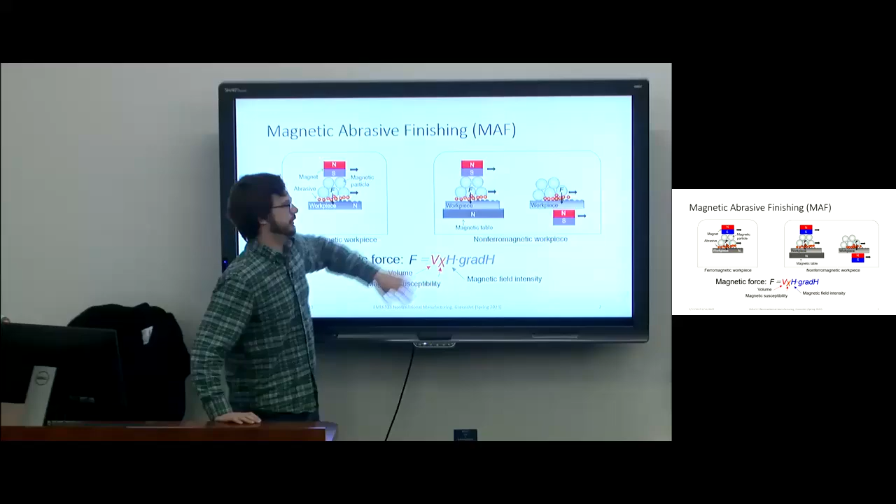So let's talk about what MAF is first. Magnetic abrasive finishing uses magnetic particles mixed with an abrasive to grind away and abrade and finish a workpiece. There are 2 sort of setups you can use for it, demonstrated here on the left and right. On the left, we have the case for when your workpiece is ferromagnetic, and on the right, the case when your workpiece is not ferromagnetic. So your workpiece does not have to be ferromagnetic for this process to work.

So here we have a magnet with the north and south pole. Your workpiece here, which is ferromagnetic, serving in this case as a north pole. So your field lines are going to be connecting from your workpiece to your magnet, and then you have some larger magnetic particles mixed with a finer abrasive.

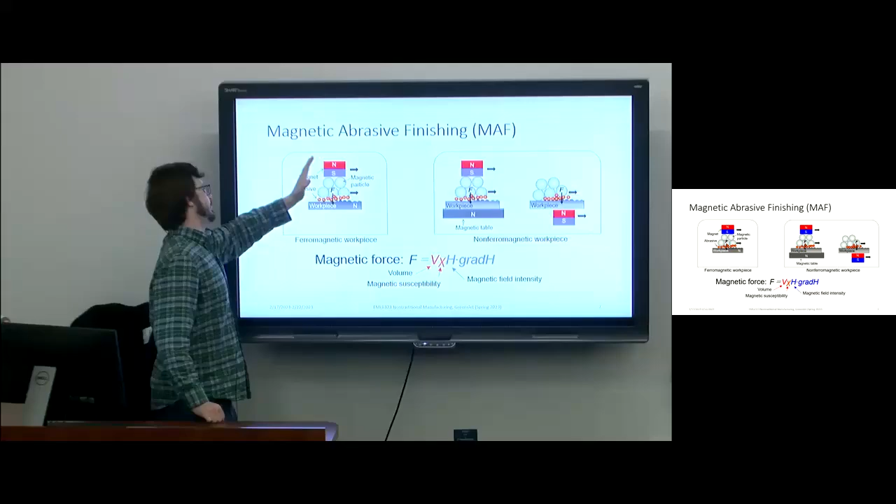What's going to happen is those magnetic particles are going to want to align with the magnetic field between your magnet and your workpiece, so they're going to form like a brush almost. Your abrasive is going to be pushed by that brush along your surface. As you move your magnet from side to side, your magnetic particles are going to follow that along with the magnetic field, and they're going to push into and slide along the workpiece, your abrasives. So that's going to grind away and gradually remove these burrs.

So you can see here, this is your unfinished part, and this is the part where it's already passed through and you've already gotten a smoother surface. So that's the case for a ferromagnetic workpiece.

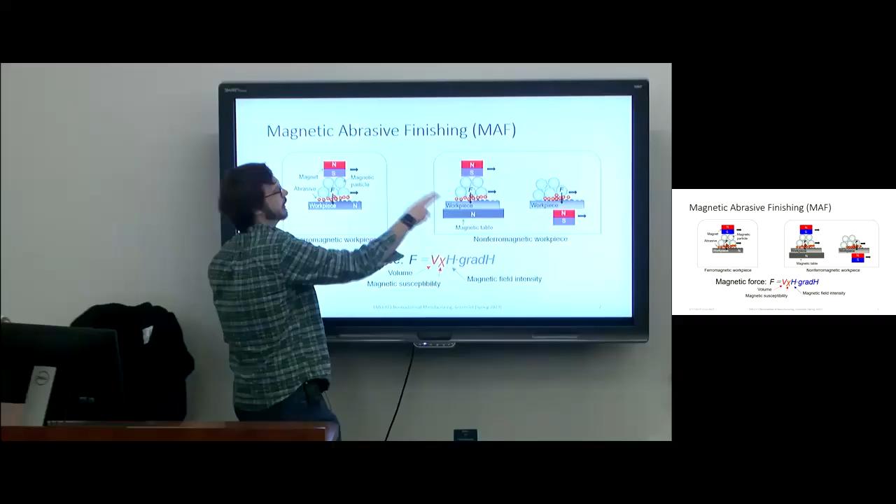Now what happens if your workpiece is not ferromagnetic? You can use one of these two setups. On the left, you can simply rest your workpiece on a magnetic table, in which case it behaves the same as the previous case, because if you treat your workpiece and magnetic table as one piece, your field lines are going to connect and permeate through your workpiece and through the table. Then it's the same process: your particles align with the field lines, and it's going to brush and move the abrasives along your workpiece and polish your surface.

Another thing you could do is simply use a single magnet like this, and then your magnetic particles are still going to be attracted to your magnet. Your field just won't be as strong. So you don't necessarily have to have a ferromagnetic table, but this will weaken your magnetic flux a little bit.

Another important point is that we're talking about magnetic particles and abrasive separately, but you can use a ferromagnetic abrasive. If an iron particle is strong enough, depending on what your workpiece is and how hard it is, you can make your brush be the abrasive itself, and you can manipulate your magnetic abrasives using your magnets. So it doesn't have to be two separate mixtures—it can be just one simple ferromagnetic abrasive that you move along.

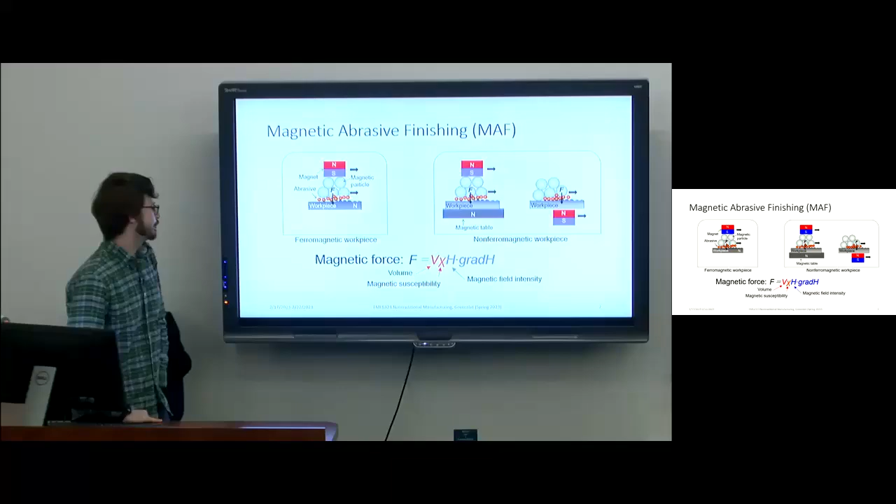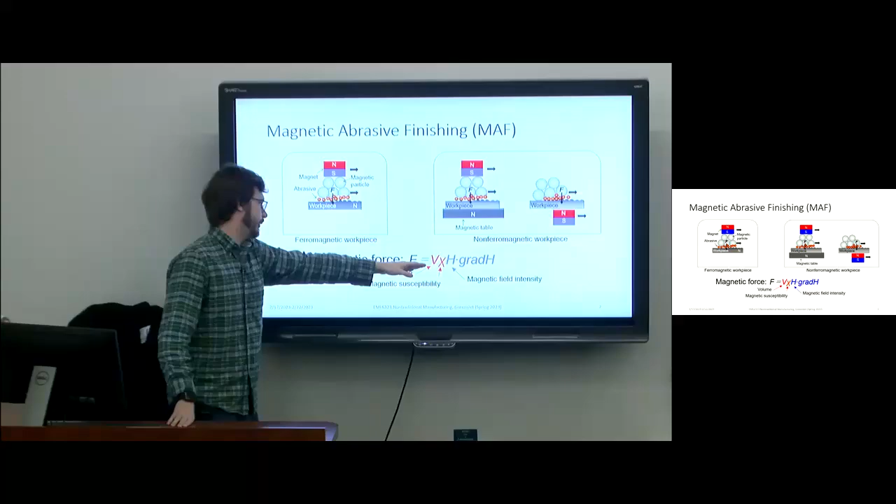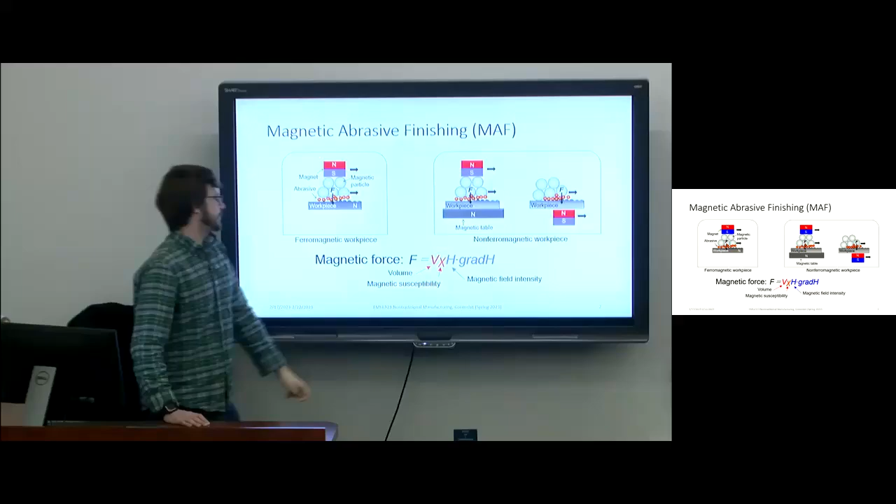We don't talk about a lot of math in this course, but just conceptually, the key parameter for MAF is your magnetic force. The force exerted on your magnetic particles is illustrated by this equation: force equals volume, which is the volume of your magnetic particles—this entire mass—multiplied by the magnetic susceptibility of those particles, a material property. H represents your magnetic field intensity, measured in Tesla, hopefully you recall that from introductory physics.

So H is a property of the strength of your magnetic field and how strong your magnets are, and you also multiply that by the gradient of H. The gradient—hopefully you guys are graduate level engineers at this point—is a spatial derivative. It is a vector quantity, which makes sense given that this is a vector and force is also a vector. So you take the gradient of your magnetic field intensity, the rate of change through space, and that will influence your magnetic force.

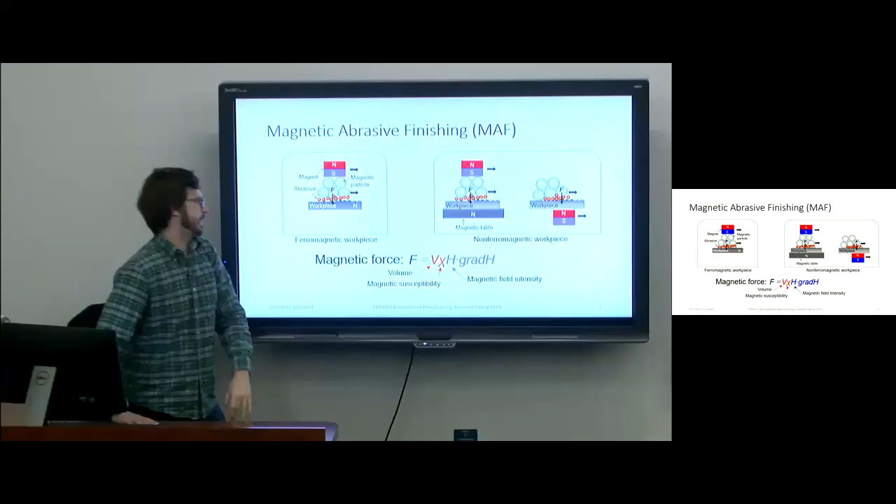Okay, so now that I've given you a brief overview of the process, let me illustrate this in a more fun way with cartoons.

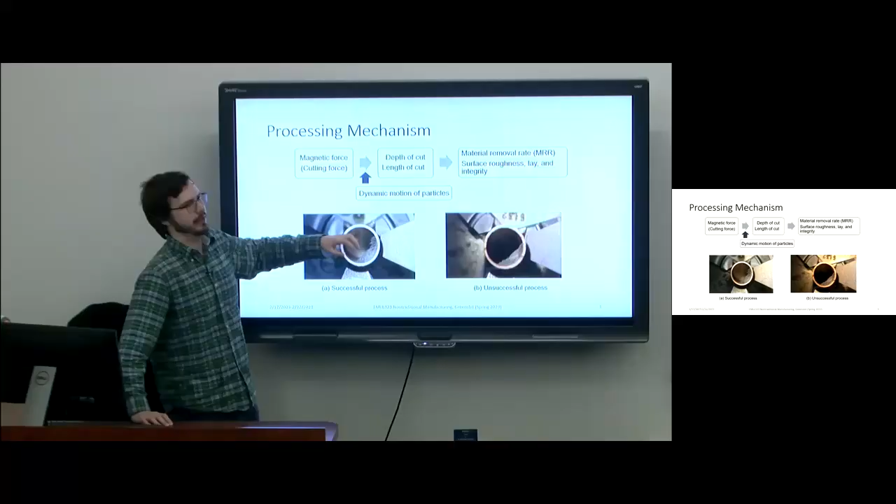So now I'm going to show you two different videos of MAF processes, one successful, one unsuccessful. First, we start with the successful process. Here we have two permanent magnets, on the bottom and on the right side of your cylindrical workpiece. Now what's going to happen is, in this process, we're going to rotate our workpiece. It's in a chuck on a lathe right now.

We want our ferromagnetic particles and our abrasive—we have a mixture of solid particles here, iron particles mixed with an abrasive—to be pushed up against this curved surface of our workpiece. Our magnetic field lines should follow as such. So we're going to rotate our workpiece, and we want these particles to stay in place while our workpiece rubs against those particles, smoothing out the surface.

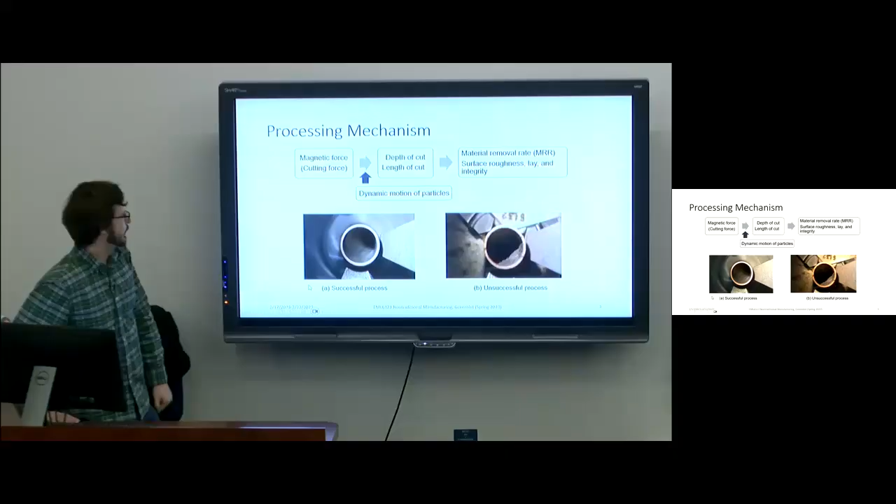And because I said it's going to be successful, that's exactly what's going to happen. It gets up to speed, and you'll notice that your particles are staying in the same region—they're not jumping around and flying around inside of that tube while it's rotating. That's generally successful. You'll have a couple maybe that scatter out, but for the most part, they're staying in contact with the workpiece. So that's what the process should look like.

All right, now I'll show you a case of an unsuccessful polish. It started off sort of stationary, but as it really gets up to speed, you'll see your abrasives going all over the place, everywhere. So you're not really getting that relative motion between your particles and your workpiece surface—you're not really getting any machining work done.

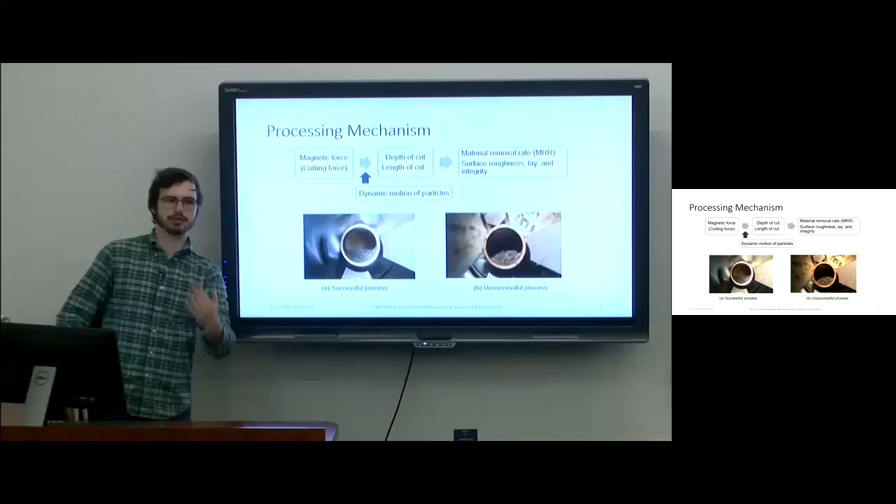Now let's talk about why this is the case. The main reason why one process was successful and the other wasn't was a matter of the strength of your magnetic force. There are two primary forces at play: you have your magnetic force, which is sort of a normal force being pulled into your workpiece, and you have your normal force that should be equal and opposite to that force. And then you have friction—as your workpiece is moving around, there's going to be a frictional force between your abrasives, your ferromagnetic particles, and the workpiece surface.

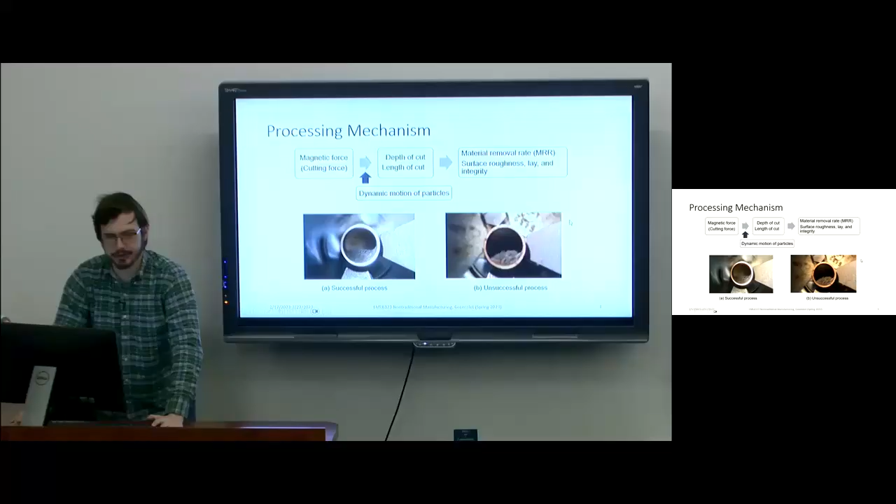If your magnetic force isn't strong enough to withstand that friction, your particles are going to go flying off. Whereas if your magnetic force is strong enough, that friction force is going to keep it in place. So it's a matter of how strong your magnetic field is to keep them in place versus the friction of the workpiece motion. That's something to keep in mind when you're designing this process—you have to make sure that your particles stay in place.

Okay, there should be a picture here. There we go. All right, let's talk a little bit about some of the advantages and the outcomes you can get with MAF.

The first advantage is what I demonstrated with the Tom and Jerry video: you have an unimpeded flow of magnetic flux through your workpiece, assuming it's not ferromagnetic. If your workpiece is ferromagnetic, the magnetic field lines will go into your workpiece and follow along its length. If it's not ferromagnetic, the flux should just pass straight through it, unaffected by your workpiece. This allows you to keep your tooling external to the workpiece and still reach internal features more easily.

Another advantage is that your magnetic abrasives are flexible chains that can conform to your workpiece surface. You have a mixture of powder that can conform easily to your workpiece surfaces, so you can finish complex internal geometries. Together, these allow you to finish and reach areas that are hard to reach with conventional tools.

Some potential outcomes you can achieve with this process: if you do a good enough job on the MAF, you can create hydrophilic and hydrophobic surfaces if you get a fine enough finish. That's an interesting property. They're not as strong in hydrophobicity or hydrophilicity relative to processes like laser machining, but you can get a hydrophilic and hydrophobic response using an MAF process. That shows you how good a surface you can get.

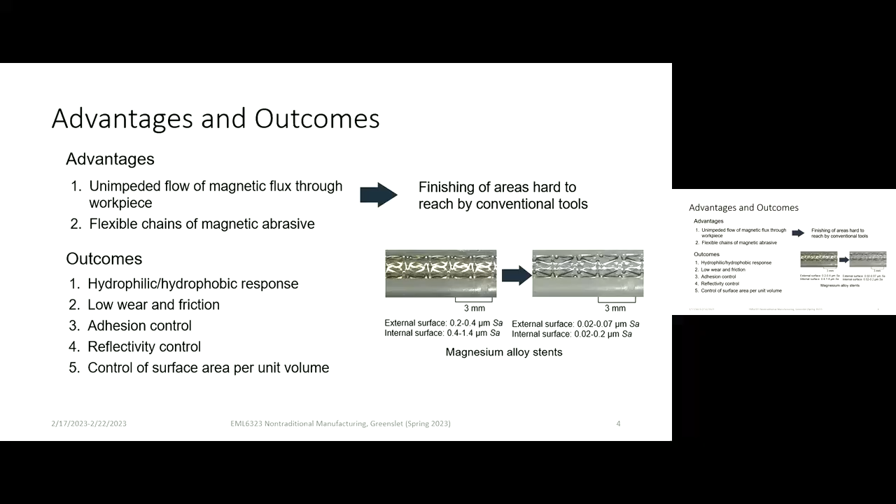We have some Sa values to quantitatively show the impact MAF has had on the surface. On the external surface of the stent, the original surface roughness was 0.2 to 0.4 microns, or 200 to 400 nanometers, and they were able to polish it down to about 10% of what it was before—so from 200 down to about 20 to 70 nanometers. On the internal surface, we also got a very good finish: it started at 0.4 to 1.4 microns, and now it's 0.02 to 0.2 microns. So it's very effective for this magnesium alloy stent.

Okay, now we're going to talk a little bit about magnetic tools. I think for today's lecture, I'm only really going to have time to focus on this first one. So we have three classes of these magnetic tools.

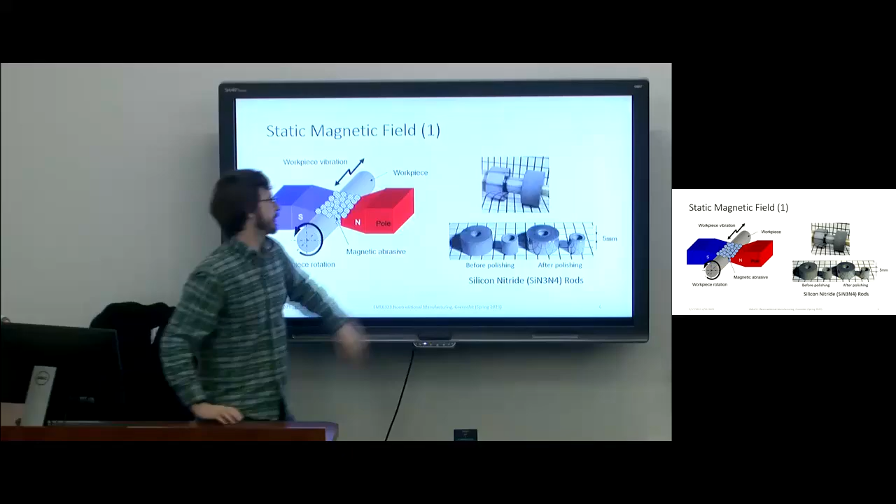In this case, these were silicon nitride rods, so this is a case of a non-ferromagnetic workpiece.

Okay, I should have pulled this up before class, forgot to. All right, so here's another example of an application using this same setup. I don't want to use edge.

All right, so this is a research paper. I highly encourage you guys to read this at home. It's only a 4-page article, so you can read this one really quickly.

What do you mean access to? I'm on UF Wi-Fi. Ugh. Can I at least look at the pictures? Oh, there we go. Okay, perfect.

Should I go through the abstract real quick? Sure, we'll start off. All right, so this article is basically describing an application using MAF to finish drill bits. These drill bits are made of high-speed steel, which is a very hard tool steel, so they're very difficult to polish. And if you're familiar with the geometry, you have that sort of helical cut in your part. So they're very hard, a relatively complex geometry that isn't the easiest to finish, smooth out, and deburr.

So this process uses magneto-abrasive machining, which is just another form of MAF, to accomplish this. Let's see if I can get that picture here. Here we go. So here we have a magnetic abrasive powder. You can't see the magnets in this picture, but they're being held basically in place through this magnetic field. And then we're moving this drill in and out of your abrasive and finishing that part.

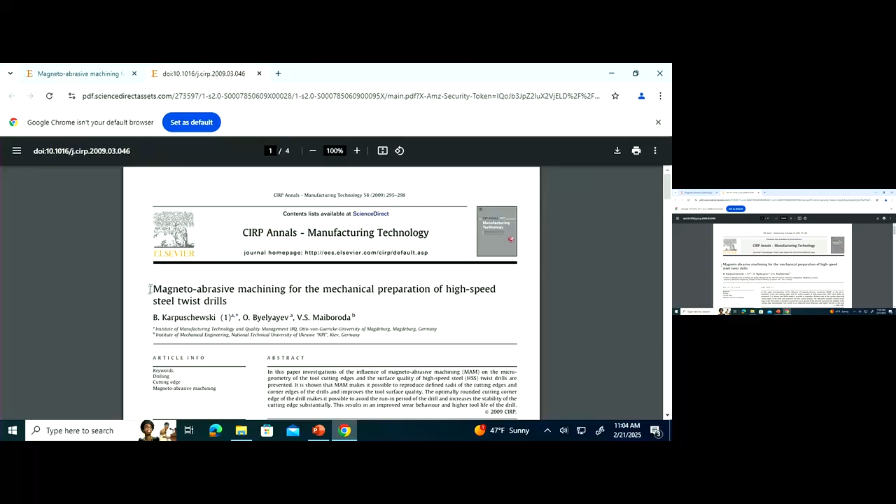I'll pause here for a second just for people watching on video who may want to grab the title and the author real quick. All right, so that's just another example of an application using MAF. Let's talk about another way you can do MAF.

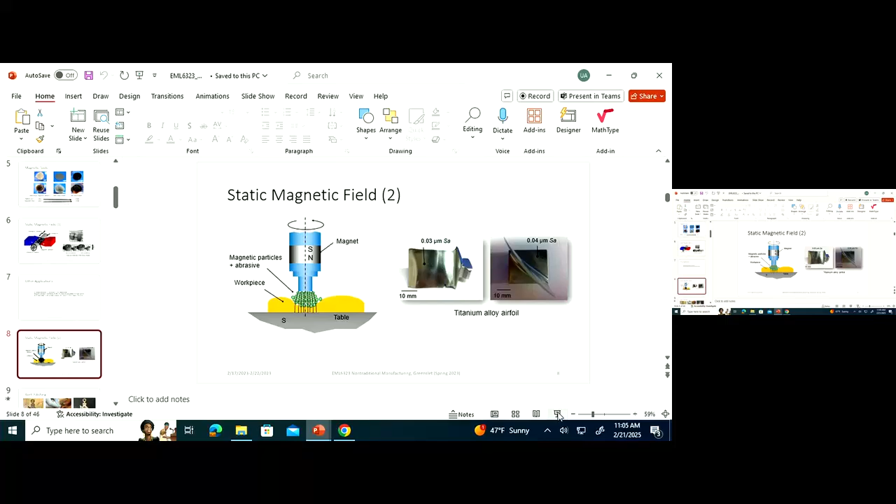So this is again using a static magnetic field, but this time we're going to rotate our magnets for this new setup. Over here we have just our table, which is ferromagnetic, and then we have a non-ferromagnetic workpiece with a rather funky geometry. We have a tool post with a magnet embedded in it, and magnetic field lines demonstrated with these dashed lines, with a mixture of magnetic and abrasive particles.

So what's going to happen is your magnetic particles are going to align with your field lines and form these long chains like a brush, a long strand of magnetic particles. Your abrasive will be resting on the bottom of the surface. Then you rotate your magnet, and those chains on your magnet rotate with it, brushing your workpiece and moving that abrasive to finish and grind it away.

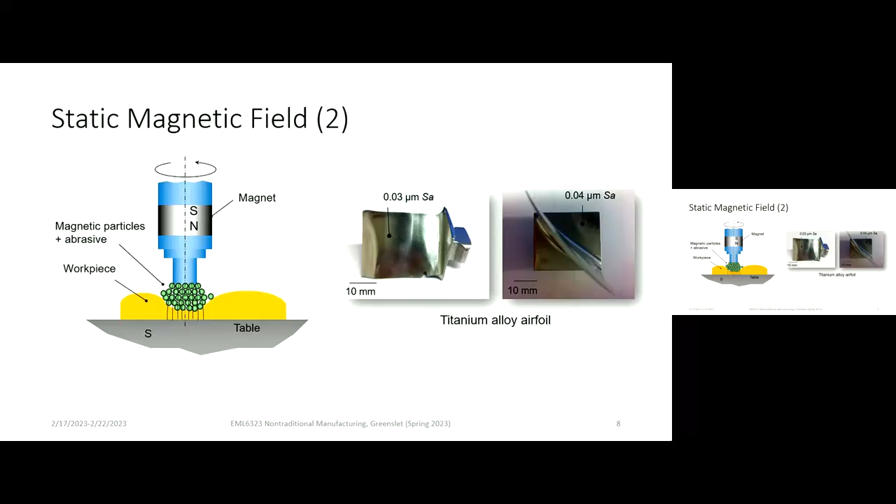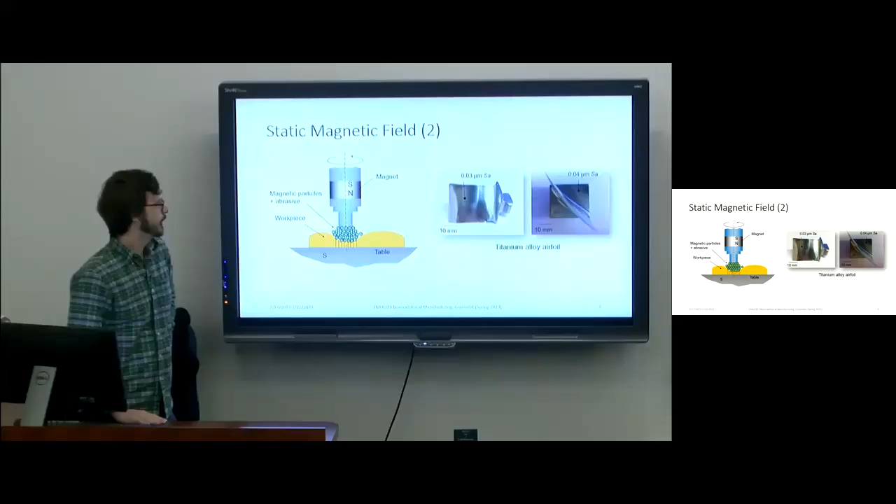Here's an application using this technique: a titanium alloy airfoil. Once again, you have a rather complex curved surface being finished using MAF. Also, titanium is a fairly hard material.

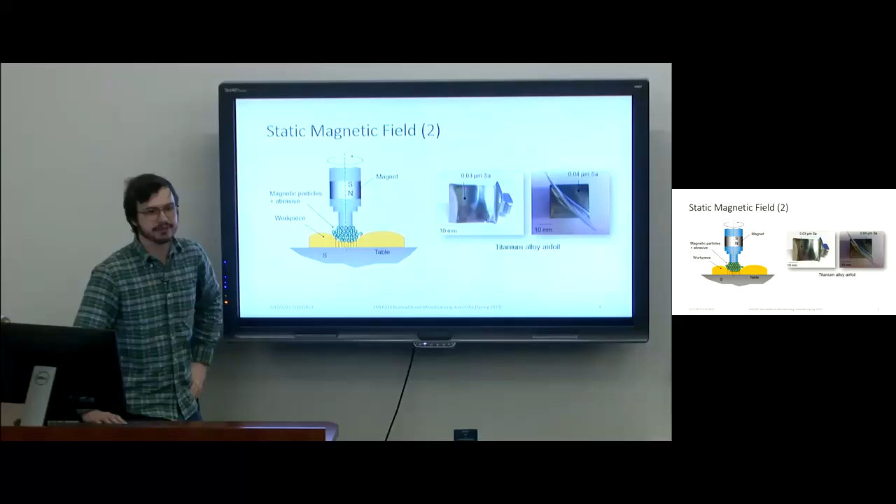Another issue you often worry about with machining titanium is the heat transfer properties. It's not a very thermally conductive material, so you get concentrated spots of heat. I'm not saying this process generates no heat, because there is friction, but I don't think it's an excessive amount, so you're still able to machine titanium with this process.

All right, here we have an example of a bent polishing.

Do we have any members here of Pi Tau Sigma in the lecture? No? It's an engineering honor society, specifically mechanical engineering I think. No Pi Tau Sigma members? Tau Beta Pi, anyone? I'm the only Tau Beta Pi guy in here?

Okay, so if you want to ask me what a bent is, it's basically this guy here, a little emblem that looks like a giant necklace. This is just their crest. So you have a picture of what the bent looked like before - you can see it's rather dull and grayed out, a very rough surface.

There's two traditional ways to polish it by hand, as you can see here - with just a cloth and an abrasive, hand polishing and grinding it away. That would typically be very tedious, obviously. But you can also use MAF instead to polish this guy.

So here we have a picture of the setup, I'll play the video in a second. This is, again, using that same setup I described on the previous slide - a rotating magnet. The gray parts you can see there, that's your magnetic brush essentially - those are your magnetic particles. And that white liquid you're seeing is your abrasive fluid. So we're basically brushing with this magnetic brush, with that rotating magnet, and abrading away and smoothing out that surface.

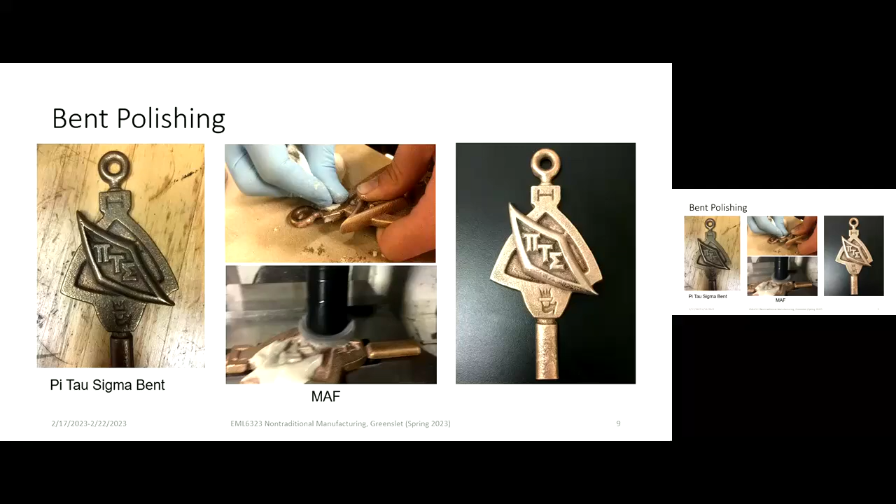And again, this is a rather intricate geometry - you have dents, you have some tight corners in there - and you're still able to relatively match that form, so you haven't compromised the shape. You can still clearly read Pi Tau Sigma, even though it's a relatively complex geometry. Whereas if you're doing it by hand, trying to get into that little gap between the two legs of your pi there - well, that worked out great actually - trying to get that by hand would be incredibly difficult. Whereas with MAF, it's a lot easier.

Here's another example using essentially the same process - this is a prosthetic knee implant here. You can see it's a curved and rather complex geometry. In this case, we're going to have still that rotating brush, but we're going to use a robot arm to move our knee implant.

So we have a mostly non-magnetic jig that's holding and clamping down this knee, and if you look really closely over here, this little plate, this part of the holder, is magnetic. It's made out of carbon steel, and that's going to allow our field lines to go from our magnet to that carbon steel plate.

And then here we can see the polishing in action. You see the abrasive - oh, that was a short video, I'll play it again. So you have a rotating brush, essentially, of magnetic particles, and then you have an abrasive paste on your workpiece that you're moving along, and you're brushing away and abrading your material.

One analogy that a colleague of mine likes to use for this is that it's kind of like brushing your teeth. Your magnetic particles are your toothbrush. You have your magnet on the base, and then they're creating these strands of ferromagnetic particles that are your toothbrush-like fibers. And then your abrasive, that's your toothpaste. You're using that to grind, though you don't really grind your teeth when you brush them, so that's where the analogy sort of falls apart. But you still have that same brushing motion, and you are cleaning it - instead of grinding away material, you're grinding away plaque, you can look at it that way. So it's very similar to brushing your teeth in that way.

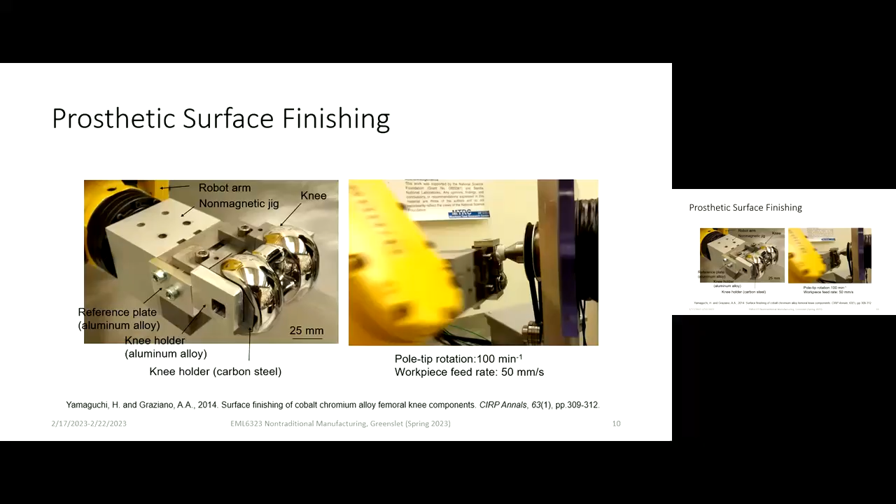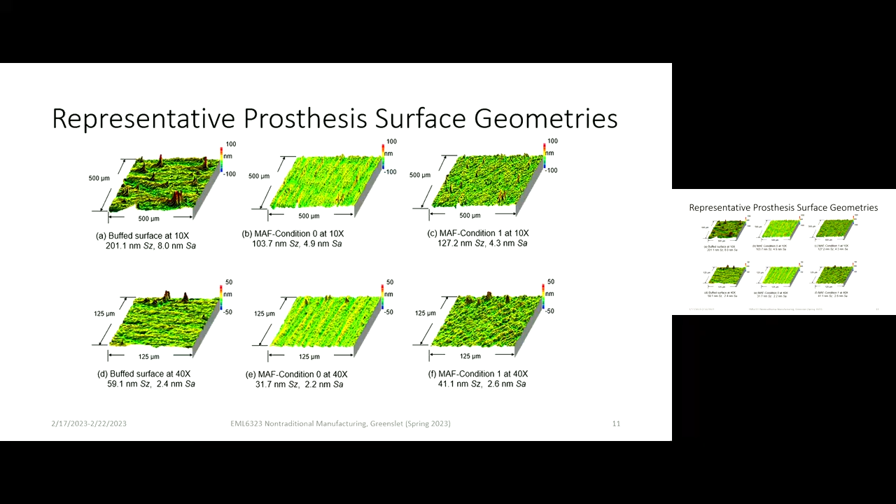All right, here's some quantitative results of the knee prosthesis polishing. On the left, that's sort of a traditional result that you would get just by traditional buffing, what's used commercially using traditional methods. On the right, you can see much smoother surface profiles that we were able to achieve using MAF. So again, typically they were getting 2.4 to 8.0 nano, and now we're getting 2.2 to 4.9 nano - a little bit better than the traditional methods, and again, once again, a very complex geometry.

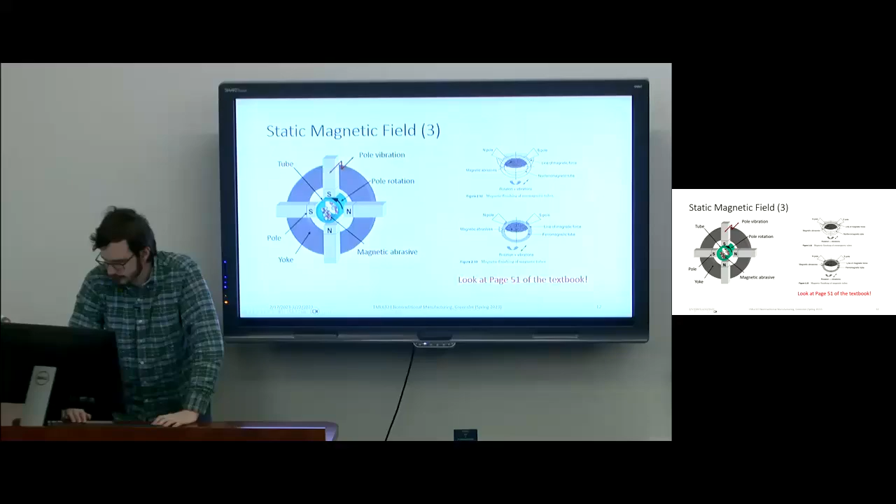Okay, now let's talk about a specific application and contrast it to a traditional, or I guess a non-traditional method, but MAF might be a little bit advantageous for this application: flexible tubes, and specifically catheter shafts.

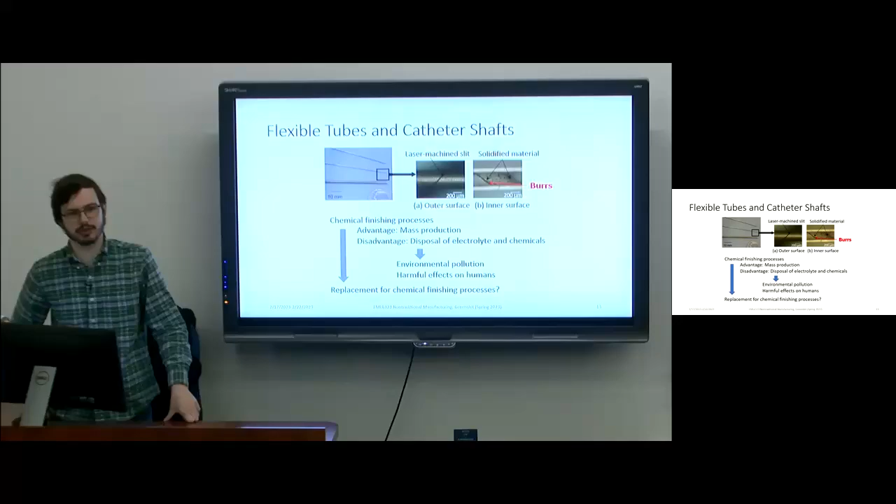Catheters are tubes used to introduce fluids into the body, like if you've ever had an IV. But similar to the stent, you need your catheter shafts to be very flexible. To do this, you machine super tiny slits into the metal, which you can see in these diagrams here.

Because these slits are so small, they need to be laser machined. The reason for these little tiny slits is, like I said before, to make it bend. If you have a slit creating a gap in the material, it's going to allow it to bend further. So you laser machine these slits, and as a result, it makes it more flexible.

But the result of laser machining is you get these burrs, because you're melting material, and when that melted material solidifies, you get burrs. So you have to finish these catheter shafts in order to actually use them, so you don't cut and scrape into your patient as you're inserting them.

The way this is traditionally done is with a chemical finishing process. You use a chemical to melt away and polish your workpiece. One advantage of this process is that chemical machining and chemical finishing are very good for mass production. You can do large quantities all at once - you just soak them in a bath, take them out, dry them out, and you're good to go.

But one major disadvantage is these are harsh chemicals with electrolytes, and they can have harmful effects both on the environment when we dispose of these baths, and potentially harmful effects on humans - the fumes, not only on the workers, but we don't want any traces of those chemicals lingering on the product when it's used on patients. So there's a strong desire to replace this process with something that doesn't use these harsh chemicals and is more environmentally friendly.

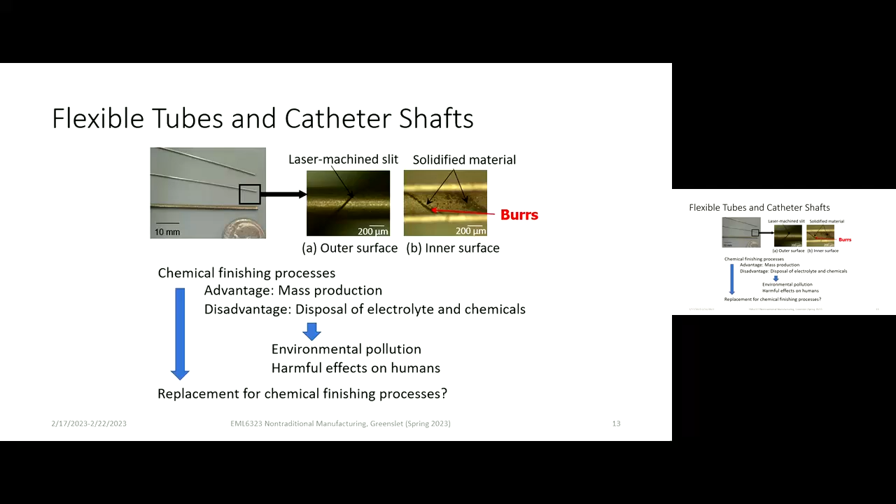So take a wild guess what process we can use instead. MAF. Isn't there another picture? There we go.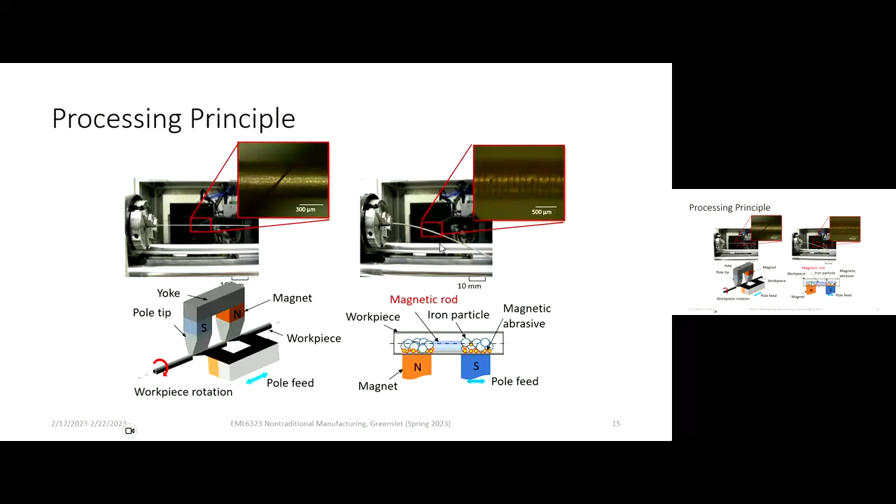Okay, so now we're going to talk about magnetic tool behavior using these rods to guide your magnetic field lines. The first case is using a carbon steel rod. Carbon steel, you should hopefully be aware, is very ferromagnetic - it's ferromagnetic throughout the entire tube.

So what's going to happen is, if you look at this case in the middle, you have your field lines from north to south, but they're going to flow into and within your carbon steel tool. So you have field lines going up into your steel rod, go through it, and then out through into your south pole. But again, because your carbon steel is ferromagnetic throughout the entire rod, what happens when you move your magnet?

What's going to happen is, because your entire part is ferromagnetic, ferromagnetic materials don't necessarily have an inherent polarity. So if you put a north pole magnet up to carbon steel, the carbon steel is going to act like a south pole magnet. And if you move a south pole magnet to your carbon steel, it's going to act like a north pole magnet. Our magnets are essentially attracted to the entire length of this workpiece.

So what's going to happen is, if we move this north magnet along your rod, it's not going to move, because your magnet is just as attracted to this section of your tube as it is to this section, as it is to this section.

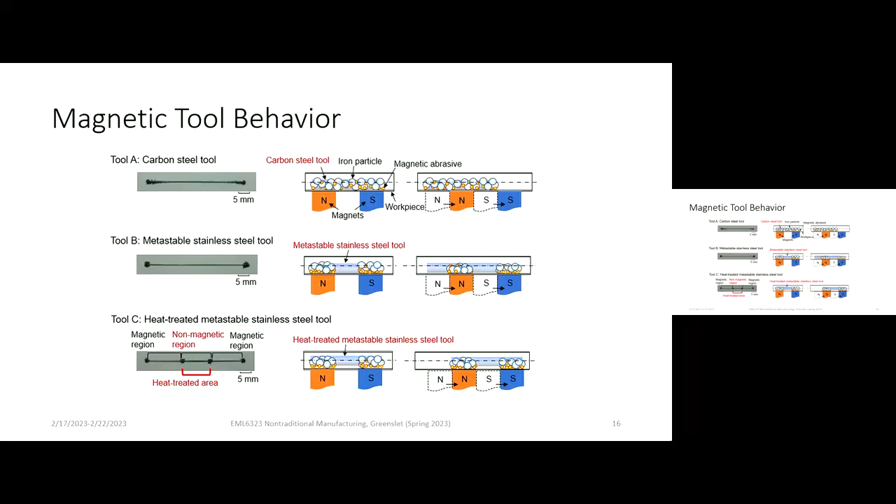So rather than the magnetic tool moving like this, it'll move like this - there's a big lag, and you have less motion as a result of that. We don't really want that.

So let's talk about a metastable stainless steel tool. A metastable stainless steel tool is partially magnetic, so your field is concentrated on the ends of your tube, essentially. What happens there is you'll get a little bit better of a motion as a result of that, but still not perfect - there's still a little bit of a wiggle.

So rather than your part starting to move all the way at the end of the rod, it'll start to move at like the halfway point, because it's still attracted to this end. Once you reach the end of that magnetic region, that's when it'll start to move. So it'll work a little bit better. Again, in this case, you see your abrasive particles are moving, but your rod isn't.

One process we'll do to try to improve this further is that you could heat treat your stainless steel to change the phase of your stainless steel from BCC to FCC.

So you guys are now in a graduate level course - this class is sort of a follow-up to production engineering. Hopefully you guys are familiar with your steel diagrams, the iron carbide diagrams, your phase diagrams - FCC, BCC, austenite, ferrite, your different phases and what crystal structures you get with your steels.

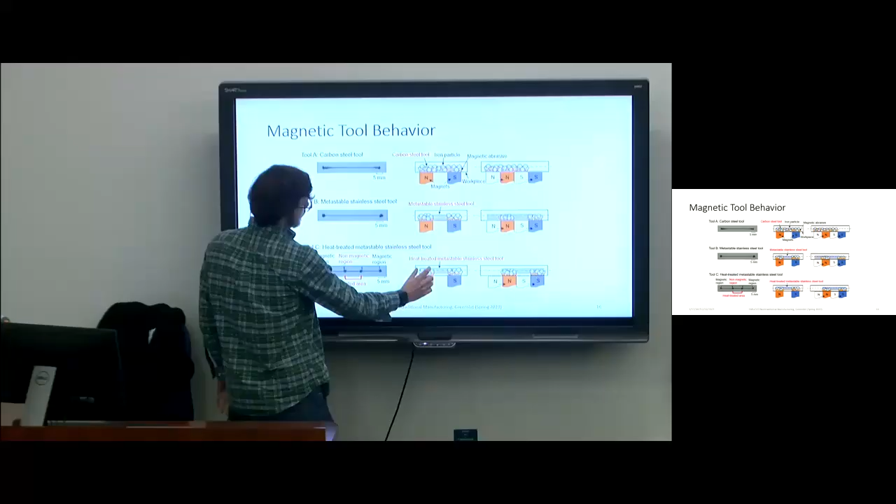So we'll have this entire region, basically this localized region here and here - two magnetic spikes here, two magnetic spikes here. As a result of those two magnetic regions, your rod is going to be attracted to your magnet at those specific regions. So as you move your magnet, the rod should move along with it in phase.

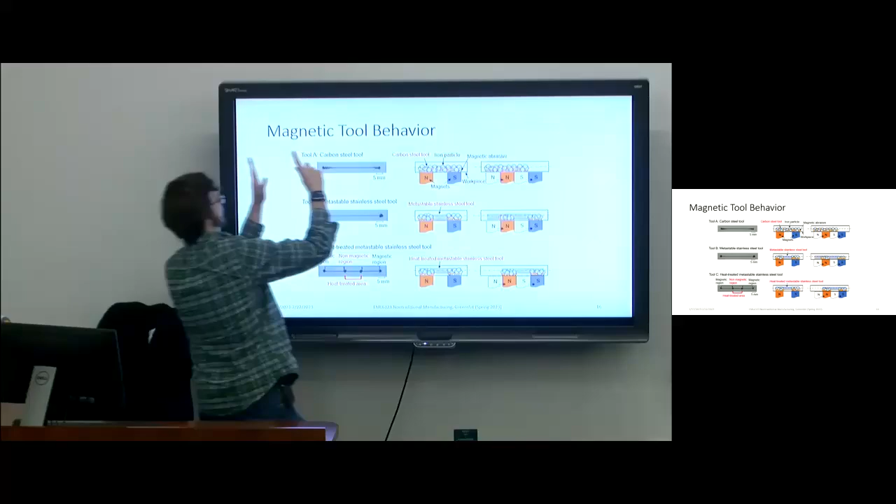So just a neat little application of heat treating this stainless steel rod to get a better tool motion.

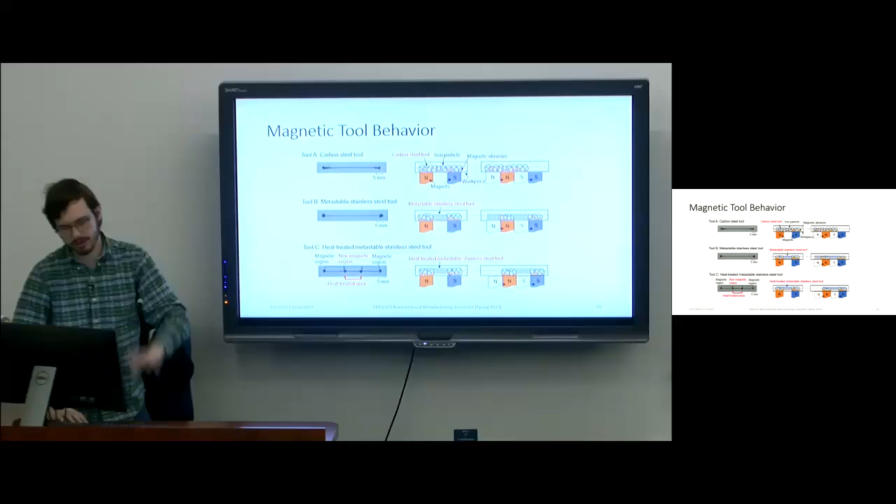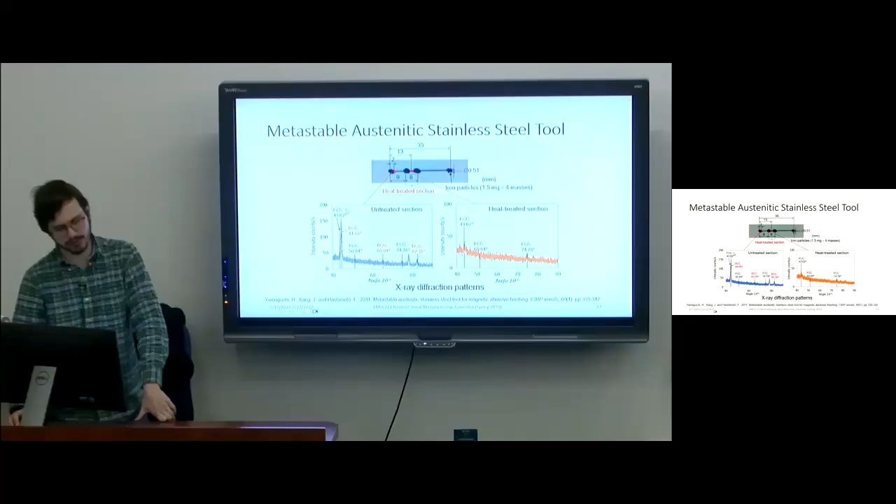All right, this here is just a diagram showing you the phase changes. So here we have a spike here at an FCC region. Well, actually, no, I think the spike here is a BCC region, if I'm reading this correctly. Yeah - here it's FCC, FCC, and then you have a little spike here, BCC, FCC, FCC, and then I think you have a spike at a BCC.

Yeah, this diagram, all in all, isn't super important. You'll get a better description if you want to read this paper.

In case you aren't aware, Yamaguchi H is Dr. Greenslet. Yamaguchi's her maiden name, so if you see a paper by Hitomi Yamaguchi, that's Hitomi Greenslet. This is one of her past papers, published in 2011, from her own past work. Yeah, just me bragging a little bit there.

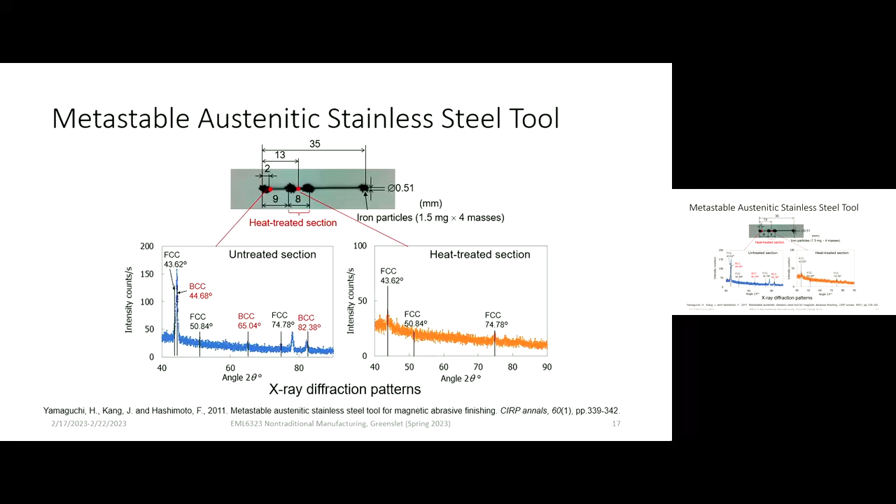This is just a diagram showing you the different regions of FCC and BCC in this steel.

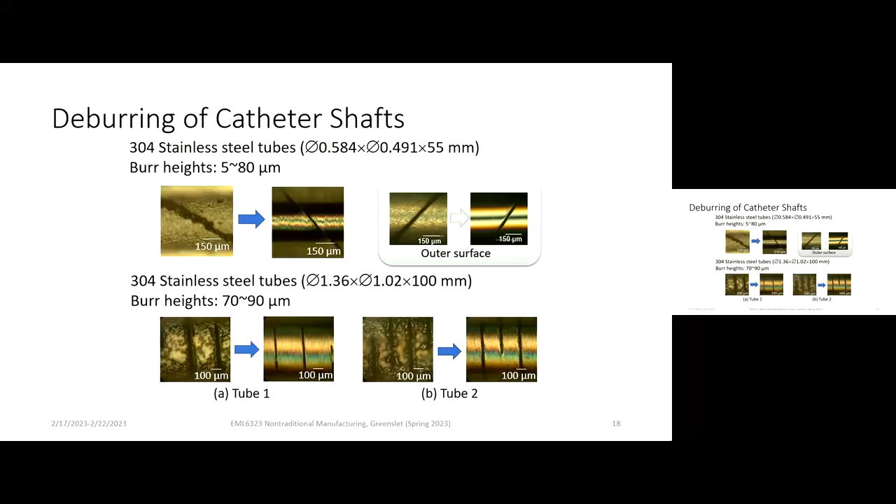Okay, let me double check ahead. Yeah, I think this is probably going to be our last slide for the day. We're starting to run a little low on time anyway, it seems. So, last application of a static magnetic field.

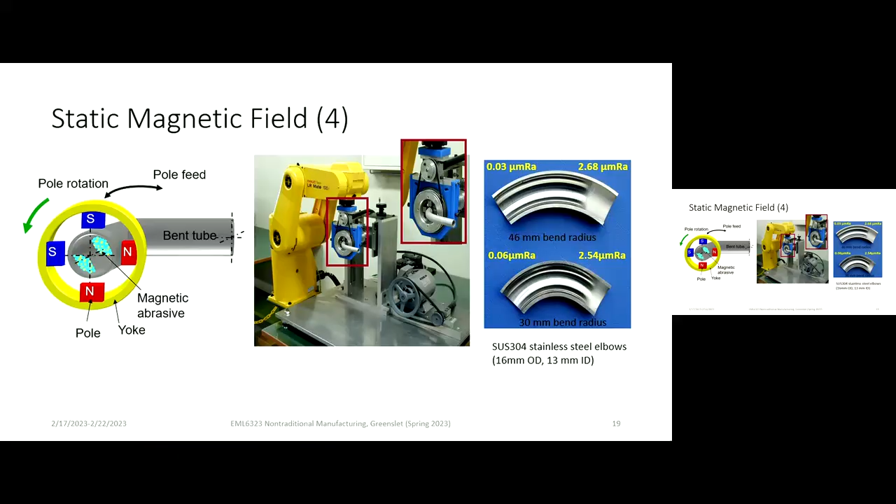So the point of this application is to show that you don't just have to work with straight workpieces, you can work with some complex geometries. It allows you to be very flexible with your workpieces. Like I said before, you can work with both ferromagnetic and non-ferromagnetic workpieces. The ferromagnetic workpieces might need a little more thought, maybe a stronger magnetic field, but it is possible with both. Once again, to summarize, you can also use this with a ferromagnetic abrasive or a non-magnetic abrasive mixed in with a magnetic abrasive. So it's a very flexible tool.

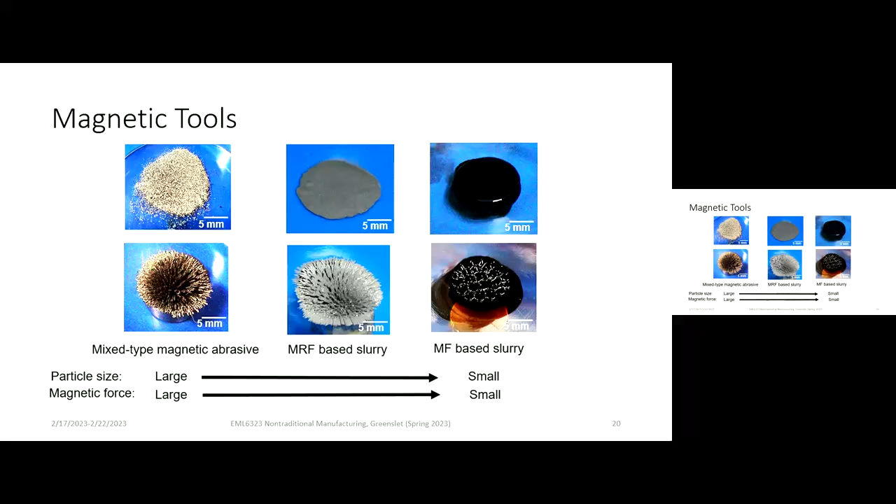Neat little process. I think we're going to end here, this is probably a good stopping point. Dr. Greenslet should be back on Monday to pick up where I leave off, and she'll go over the more fluids-based material. What we talked about today's lecture was your solid powder abrasive.

So you have a mixture of 2 different powders and it's all solid. What she's going to probably talk about on Monday is, okay, what happens if we use a magnetorheological fluid? So you have an actual slurry, whether that's a water-based or oil-based fluid, mixed in with magnetic particles and an abrasive. As a result, you get more of a flow and perhaps a finer finish. Like I said before, we're going from large particles to smaller particles, and as you go to smaller particles, you get finer finishes, less material removal, but a better surface finish and finer material removal.